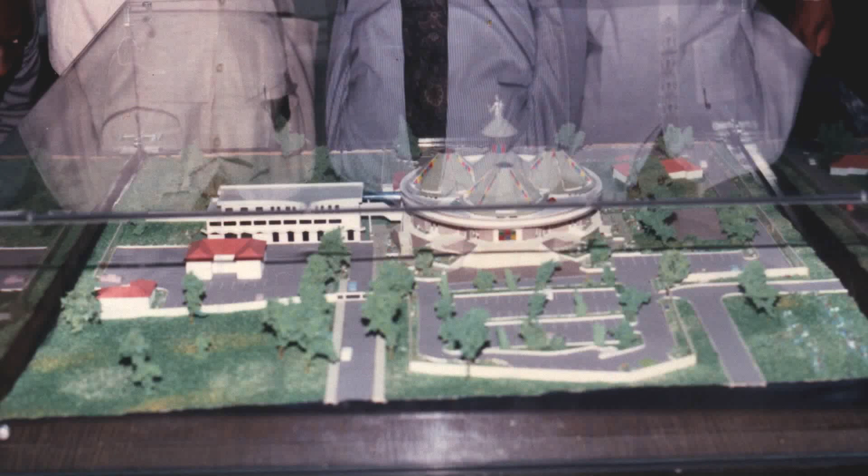The Shrine of Mary Help of Christians Upper Hill was recognized as a Marian shrine on 30th March 1989 and has since experienced phenomenal growth. From a humble compound with several old residential buildings, there is now a modern compound bustling with various facilities, comprising a state-of-the-art sanctuary, a multi-purpose hall, and the head office building of the Salesians in East and Central Africa.

The growth of the shrine has seen the number of worshippers and pilgrims increase greatly, exerting pressure on the existing facilities, especially the parking space.

In 2015, the then parish director, Father Emilius Salema, set up a committee to try and find a solution to the parking problem. After many meetings and consultations, the committee presented to parishioners a design for a mixed-use development during an open day in April.

2016. I would say that this project is coming at the right time. This shrine is going to be 25 years in 2019, in July of 2019. And over time, when the pioneers were designing this shrine, they did not have in mind that it would in fact become a center of worship in this manner as a parish.

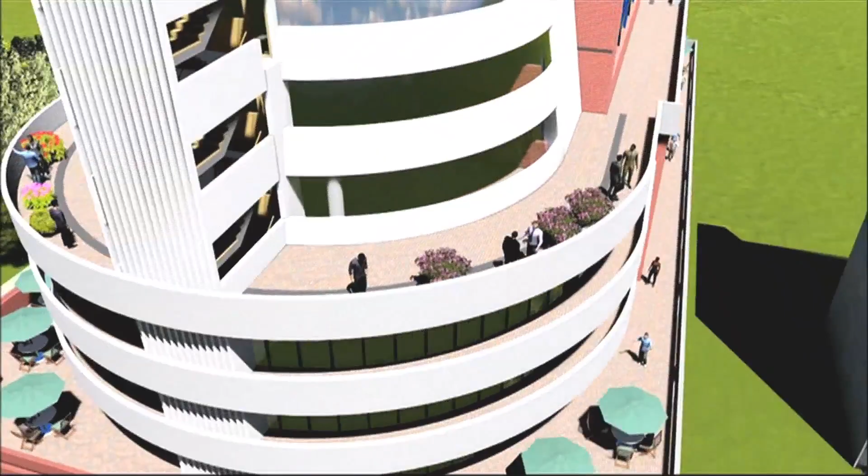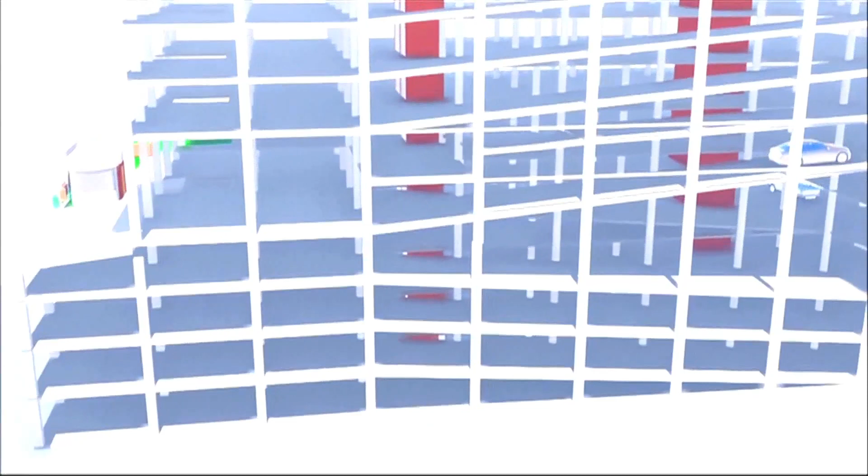The Ark, as the building was aptly named, was a 12-story building that was to be a mixed-use building, which would be constructed on an undeveloped plot in the shrine compound. Shaped like an ark, the proposed building was to be wide at the bottom and conical at the top. The design had evolved from the original humble car parking silo to a fully fledged mixed-use development.

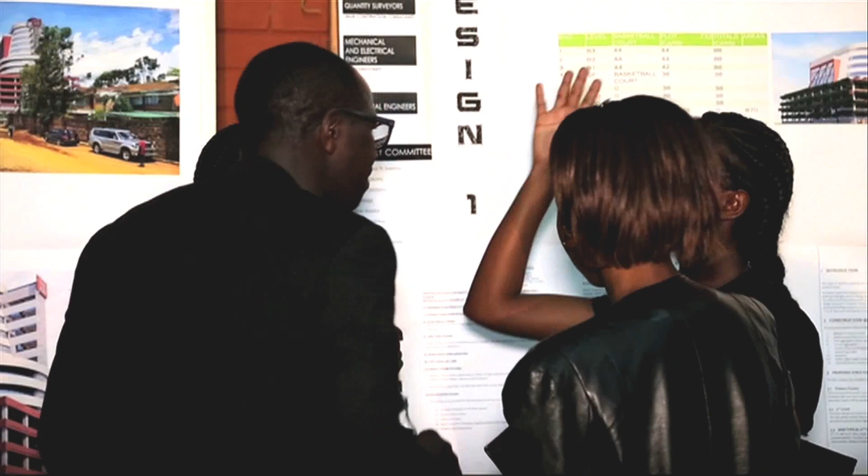During the first open day in April 2016, the parishioners of the Shrine of Mary Help of Christians Upper Hill gave their views about the proposed development. These recommendations and input have now been incorporated into a final design after being subjected to a feasibility study.

The new design was presented to the parishioners during the second open day held on 17 September 2017. Previously we had 4 basements, but we had to add a 5th basement so that from the ground going upwards is freed for commercial activities.

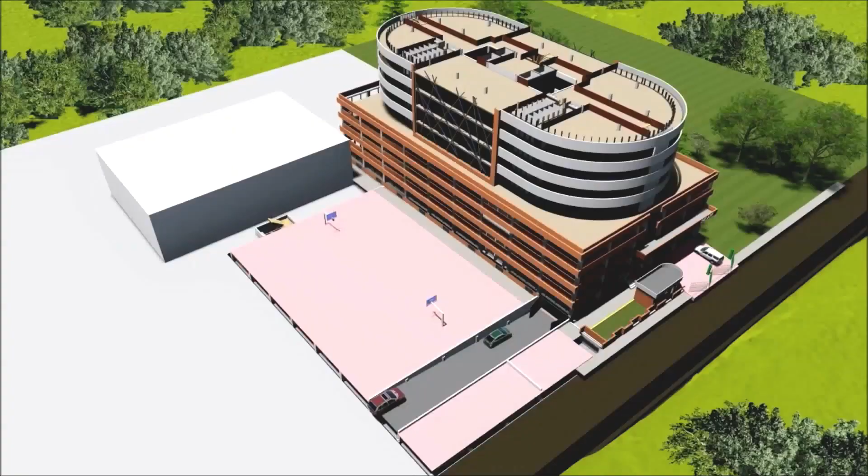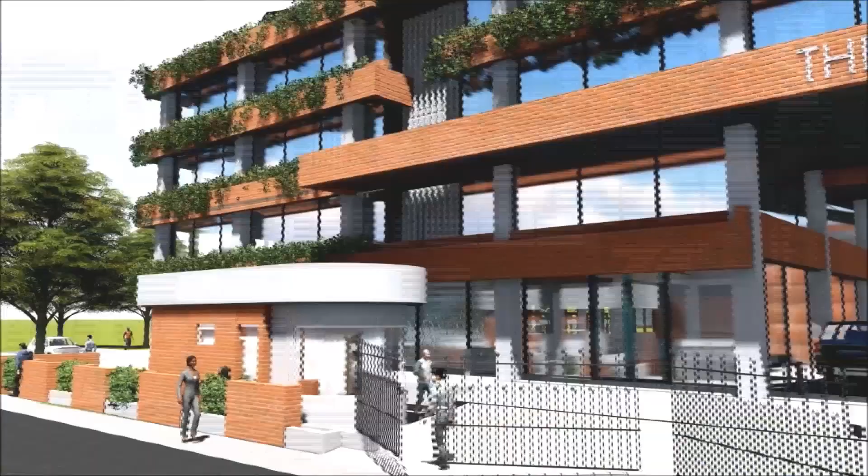This new building, that will be the latest landmark in the prime Upper Hill area, will afford one panoramic views of all facades of Nairobi city. The new design seeks to optimize the use of the available space and to get maximum benefit out of the potential of the shrine plot.

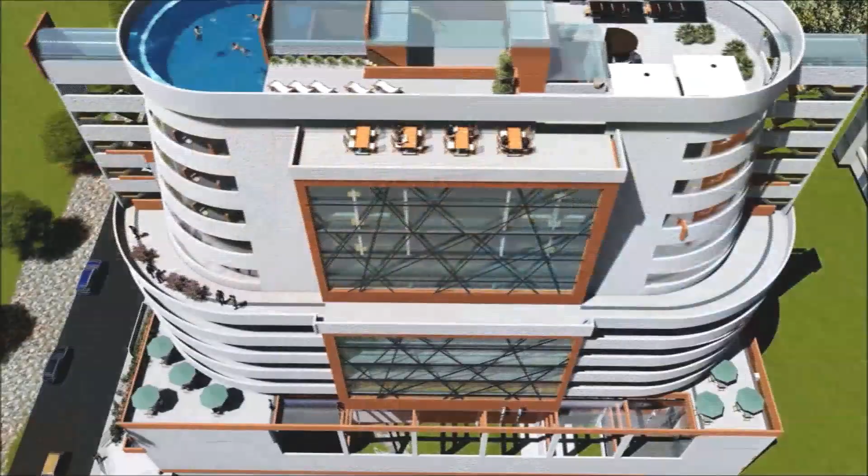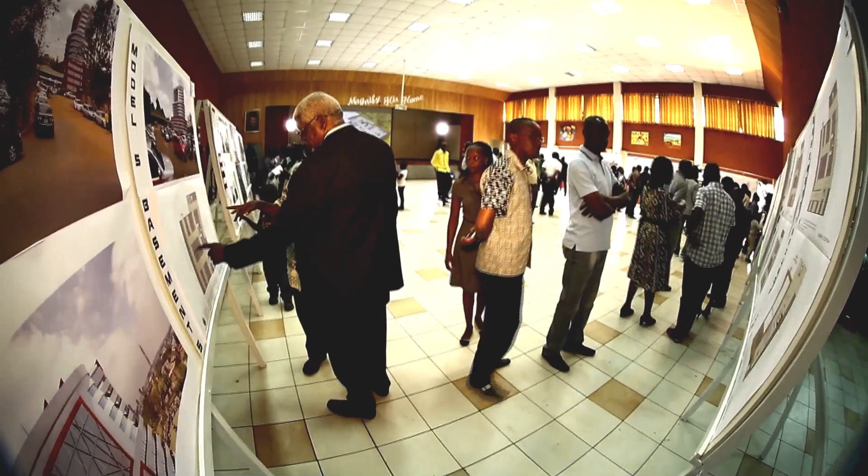This project embraces worship, takes into account the beauty of the existing shrine, and is fully responsive to the church's needs. This new building will be rich in imagery of Noah's Ark in the Bible. The Ark corresponded to the dimensions of the human body, which, according to Christian doctrine, is the body of Christ and in turn the body of the church.

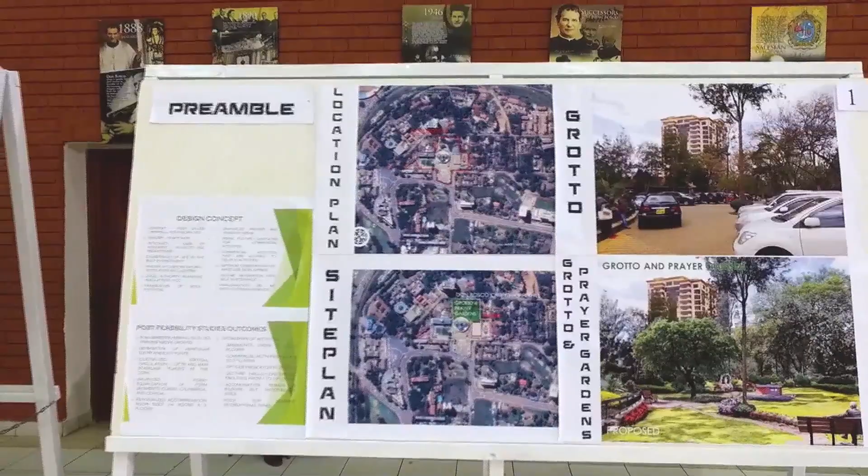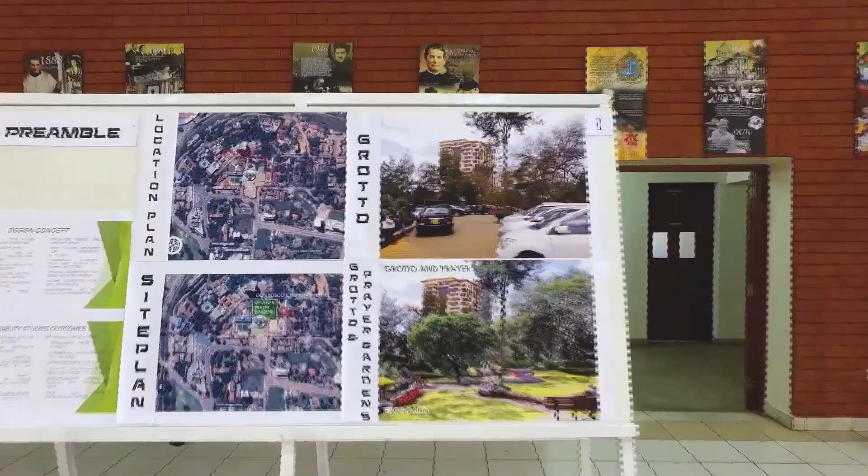Board number 1 presents the design concept. The design concepts are the principles on which the final design is grounded upon. It lists the guiding principles in design that shaped the end product. We considered efficiency in use of the building, and specifically accessibility and movement within the car parking areas and vertical movement into the upper spaces.

Board number 2 shows the design evolution from where we started the project as a parking silo, progressing to design 2 and design 3, and now we have a fully fledged mixed-use development.

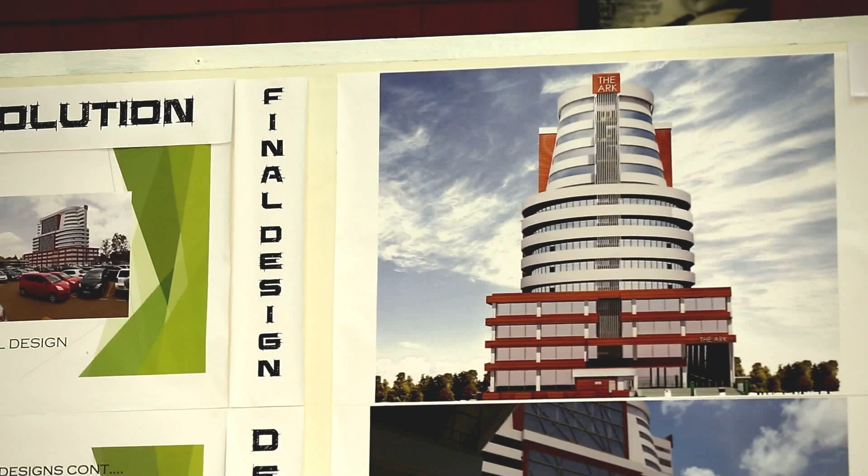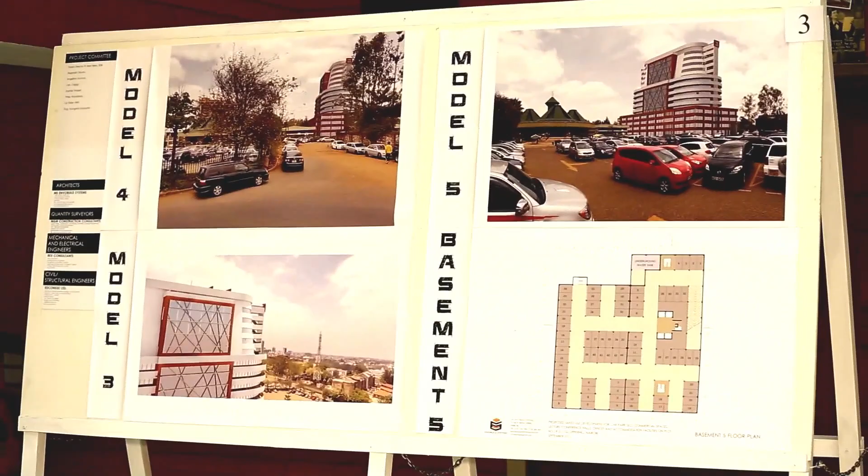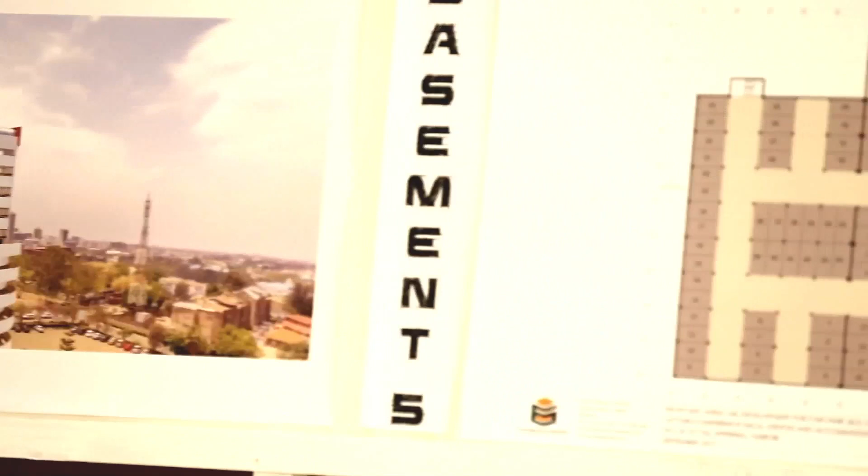Board number 3 also shows us the context, how the building fits into the existing. It shows us the views, the panoramic views that the building shall attain at higher levels, and also gives us the lowest basement, basement 5 floor layout plan, where we have the parking spaces together with the bulk water reservoir.

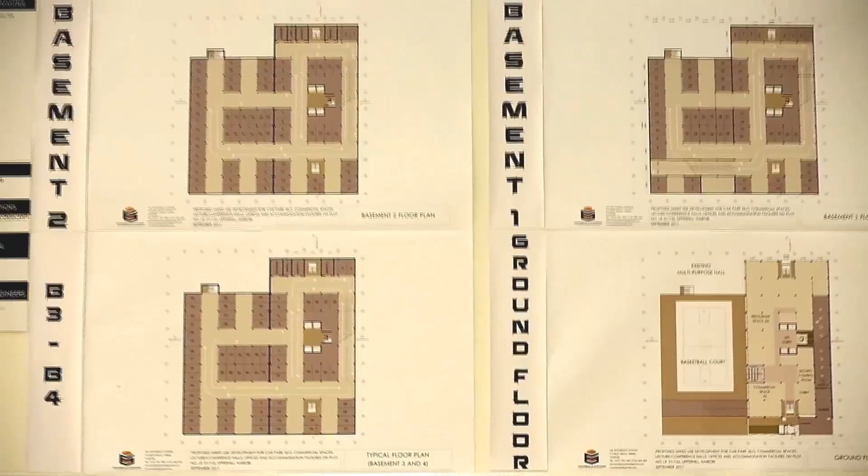Board number 4, we have floor layout plans. This has basement 1, basement 2, basement 3 and 4. And on this board we have the ground floor layout plan showing that the basketball court shall be reinstated when all the basements are fully done. And secondly, the inlet into the basement parking shall be from the main gate entry point at the church, and exiting will be at the neighboring access road.

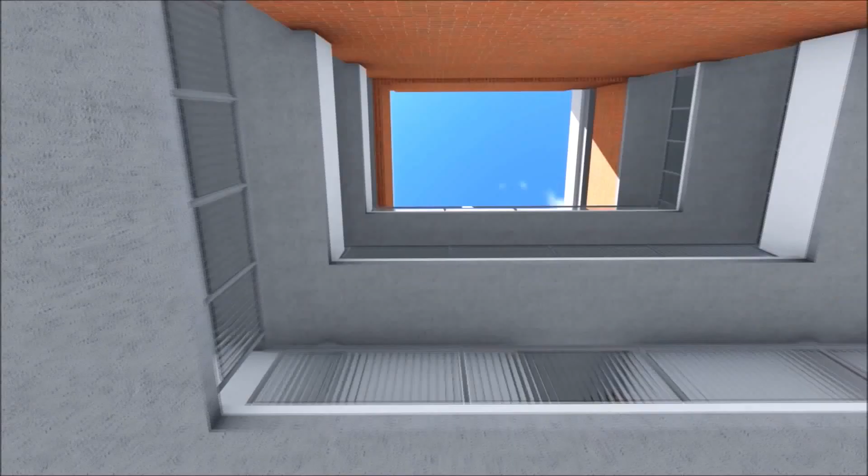Board number 5, here we have mezzanine, first, second and third floors. The mezzanine and first floor are dedicated for commercial activities. On the second floor, we have purely office space. At the third floor level, we have lecture halls, cum conference facilities.

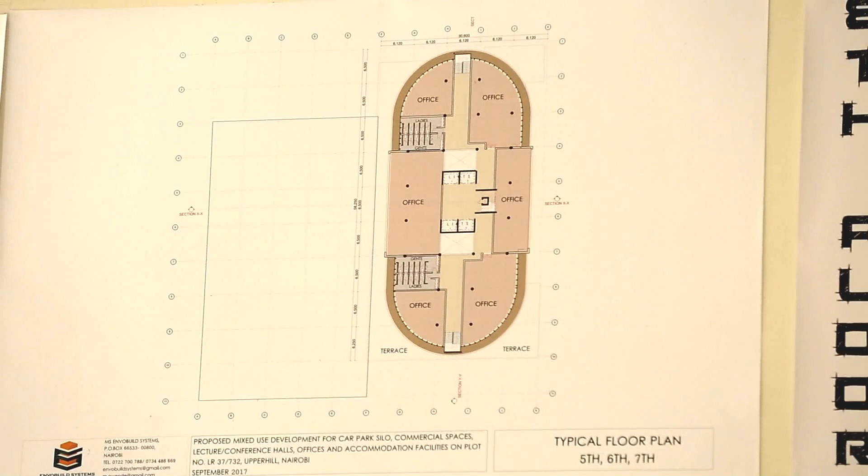Board number 6, still floor layout plans. This one we have lecture halls at 4th floor level. We have typical 5th, 6th and 7th floor layout plans, which are all open plan office spaces. 8th floor, we have office spaces together with its terrace. 9th floor, office space.

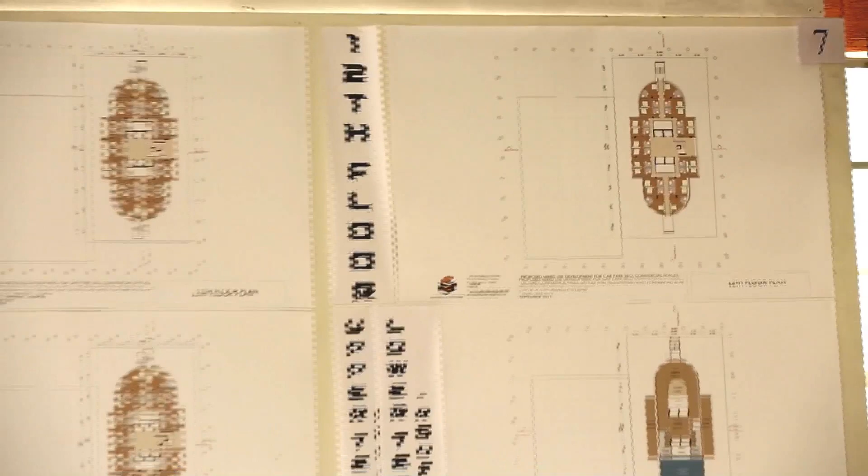Board number 7, floor layout plan for accommodation spaces. We have accommodation at the 10th, 11th and 12th floor level. On each level, we are having 22 executive rooms.

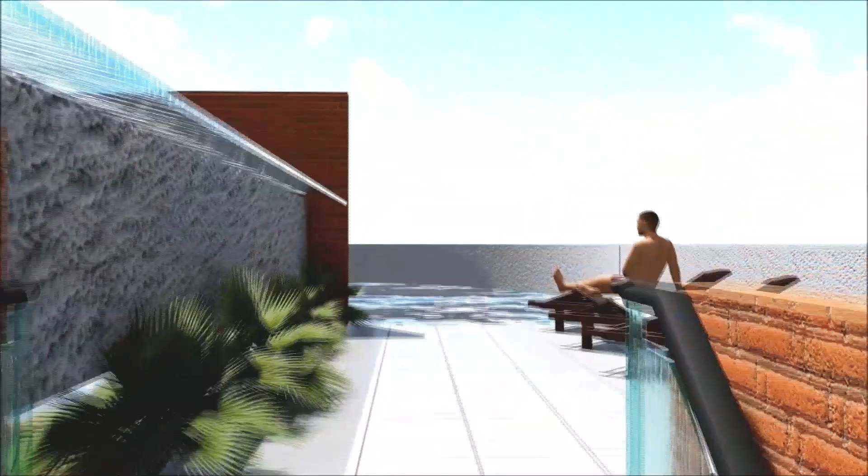We have the roof level, the plan showing the lower terrace level and the upper terrace level, which is purely for recreational activities, complete with a swimming pool. At that level, the building shows a commanding view of the entire CBD.

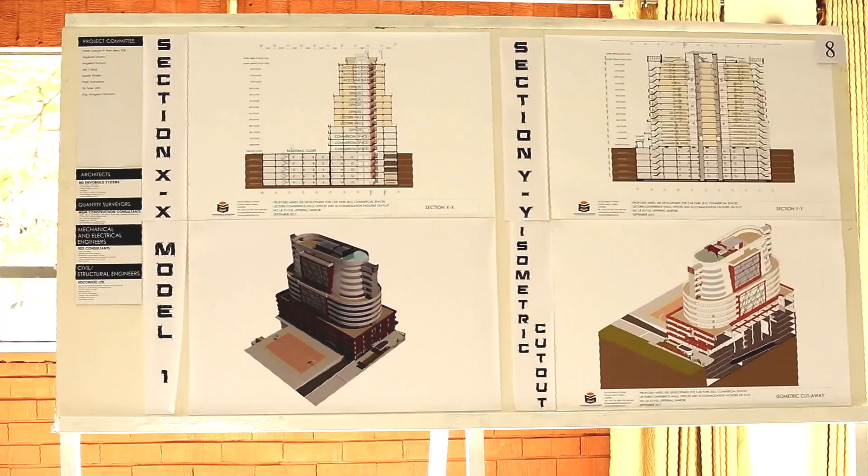Board number 8, sections showing a cut through the building, showing all levels from the lowest basement to the rooftop. The sections expose the activities and the combination of those activities vertically. And the same board gives you the three-dimensional impression of how the building shall look like as viewed from above.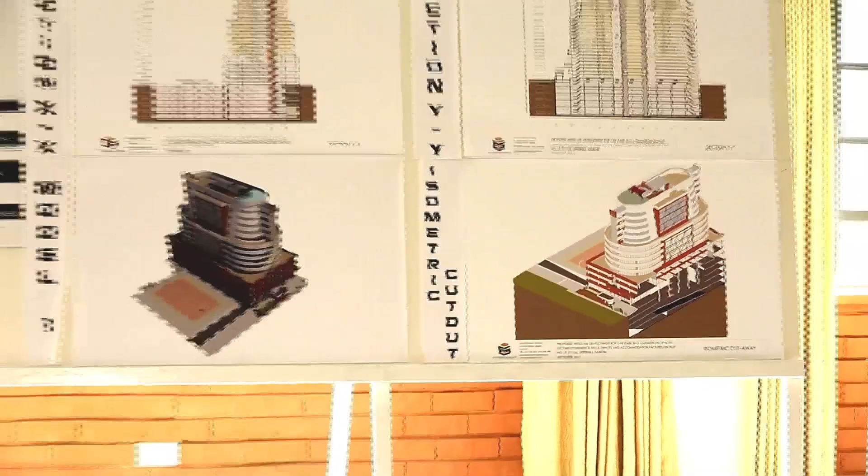Board number 9 shows those panoramic views that our project intends to exploit. From the second floor, going all the way to the rooftop level, at this point in time, we are able to view virtually the entire CBD because there are no obstructions in the neighborhood yet.

Board number 10, the last board, gives the timelines, how we move from here forward. Running concurrently with the open day, there are the planning activities: extension of leases, change of use and amalgamation.

The location of the project in the Upper Hill area of Nairobi is ideal because it is easily accessible for worshippers, pilgrims and other visitors. The design of the proposed development will ensure that the grotto area will be freed up for worship and pilgrimage, and with the relics of Don Bosco, one can have a very fulfilling day at the shrine.

The new design has factored in the rationalization of building elements. It is shaped as a cube at the bottom, a modified cylinder at center, and a modified cone at the apex of the building.

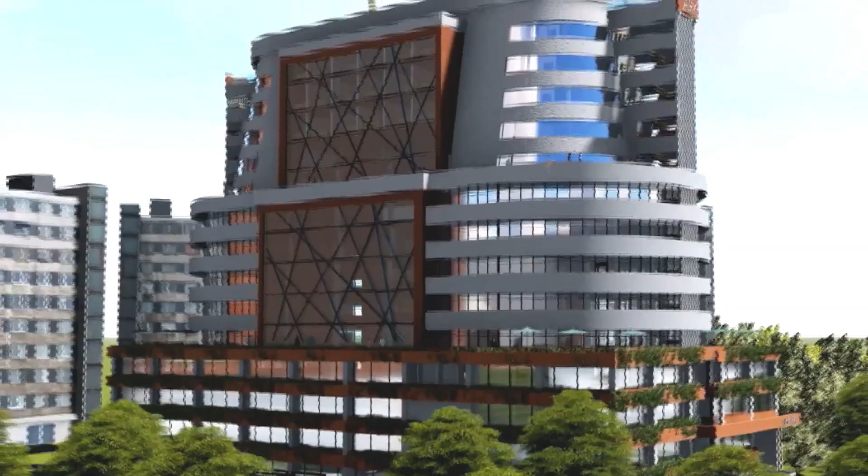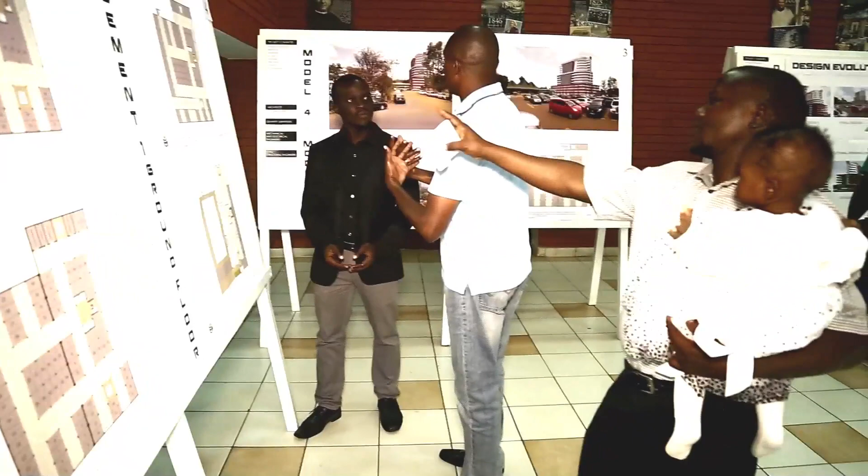There are still some crucial steps to be taken once the current design has been approved by parishioners and their recommendations included. The project building committee will receive as many recommendations from parishioners as possible to make the whole process very inclusive and participatory. All suggestions that come for the betterment of the design shall still be incorporated.

For the project planning committee, it has been a long journey that has involved putting in long hours and having wide consultations with many people. The committee has been meeting weekly on Mondays to plan for the project.

So we had a design and planning committee which was headed by Peter Meriti, and that's the committee we charged to work with the consultants to actualize this. We also noted we needed resources, so we formed a committee on fundraising, headed by JJ, John Jagi, whose role was to think around the ways we can raise money to fund this project.

Although we didn't even know the numbers as yet, we had estimates, but we started thinking early of how we can be able to come up with this. We also came up with another committee called the Finance Committee, chaired by Philip Wandiba, and the purpose of this committee was to think about the financial modeling.

The committee has put together a 34-month program for the delivery of the project. The detailed program will ensure that all the required steps are followed so that the project is completed within the estimated time and meets all legal requirements.

We were able to agree together with the leadership of the church itself, the Salesians, that we will hive off a part of the land from the main church property, annex it to the plot to make it 1 acre, and also create a special purpose vehicle that would be able to host this property. The Shrine Director, Father Abel Njeru, believes that this project has come at the right time.

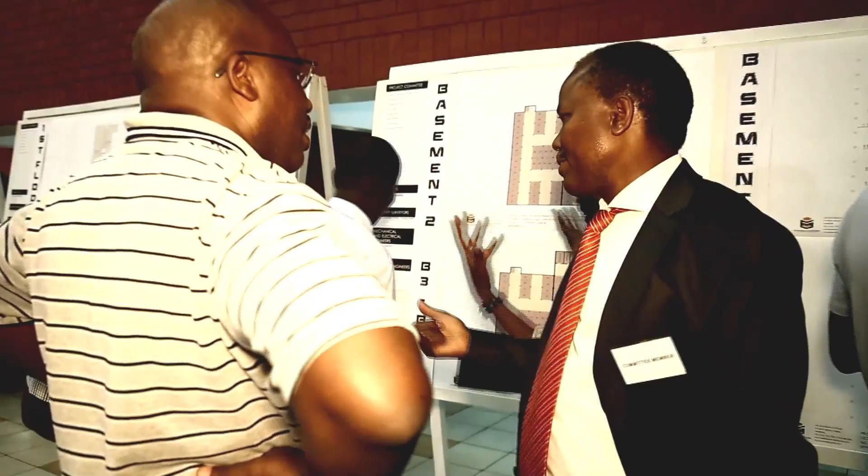A lot of financial resources will be required to make the dream come true, but where there is a will, there is always a way. The project is not for doing business, but for the salvation of souls. Every contribution made towards the realization of this project is directly linked to the salvation of the soul of the person who gives that support.

The financial model of the project is Build, Operate and Transfer, BOT. The committee found this financial model to be the most viable. The planning committee will identify a contractor and financier for the project.

To make this dream come true, the fundraising committee of the project has come up with several ways of raising funds for the project. For the parishioners, our appeal is this is a project, it's our project. We are the church. They can help in very many ways, including looking for BOT partners.

They can also chip in their own resources. We cannot come up with all the ways in which they can help. It's only us individual parishioners who can tell how they can help. So we appeal to them to step forward, whatever you can do to assist realize this project.

The parishioners at the shrine have given tremendous support to the planning committee. A lot of input from the parishioners has been considered in coming up with the final design of the project. Many have given their financial support, while others have offered spiritual support. The parishioners have positively received the new design and are looking forward to its commencement and completion.